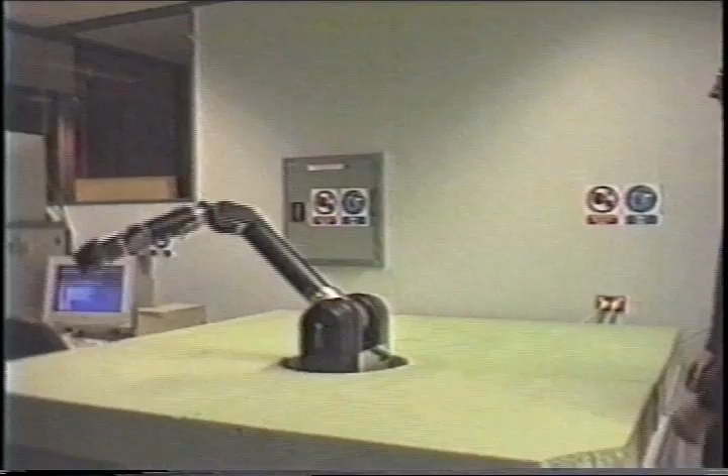Instead of trying to develop a perfectly safe autonomous system, the robot should be viewed as a sophisticated tool. The human operator is responsible for using the system in a safe manner. Therefore, the behavior of the robot must be predictable and intuitively understandable. Autonomous functions are required to make the robot an efficient and convenient tool for the user.

In this approach, the basic robot behavior is to compensate for its own weight in a way that is perceived by the user as predictable and non-threatening. This video shows a person safely interacting with the robot.

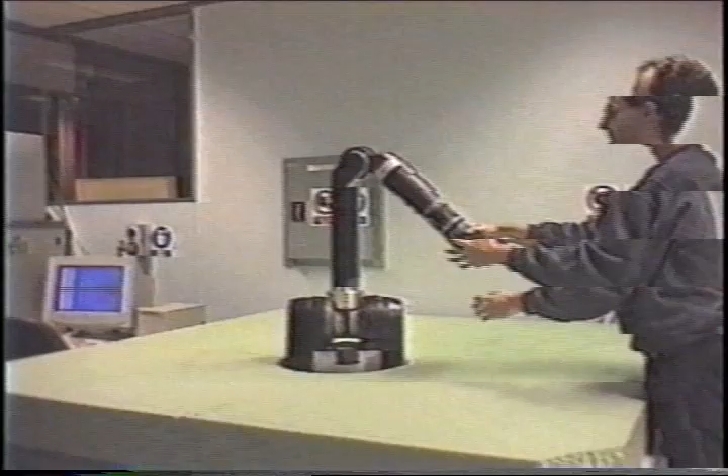The next stage in the robot's development is to allow autonomous motion to desired goal configurations, while preserving the original characteristics of the zero-G floating behavior. The system strictly limits motor torques in a way that ensures safe operation.

Finally, it is planned that the robot will be controlled by a visual interface developed at our laboratory that detects the user's gaze point and facial gestures.

When the arm is not actuated, it drops to the table heavily, and the effects of gravity can be easily observed.

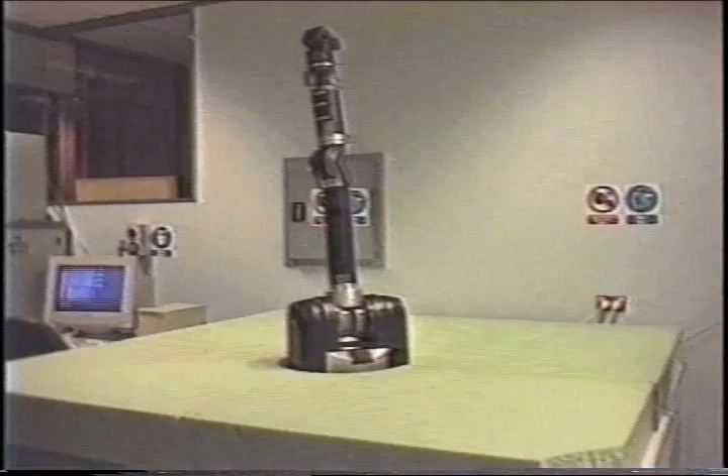In this experiment, the gravity constant is increased by 60%. The overcompensation of the gravitational forces makes the robot try to reach a vertical configuration as if it was hanging from the ceiling. The small friction with the cable drives makes the robot swing for a while before the friction consumes the kinetic energy and the robot points upwards.

Human-Robot Coordination: Real-Time Stereo Face Tracking System, Australia.

This video demonstrates our real-time face tracking and gaze detection system using a stereo NTSC camera pair and a Fujitsu vision processor. The facial model is automatically acquired by first finding skin-coloured regions in the image, then using intensity information to extract templates of the eyes and mouth. Using these facial features, a 3D model is built by stereo matching.

This sequence shows real-time 3D face tracking. The two images correspond to the views of the left and right cameras. The facial features being tracked are marked with squares. The system fits the previously acquired 3D facial model to the live video inputs, and is robust to rotation and translation motions, as well as deformation and partial occlusion of the features.

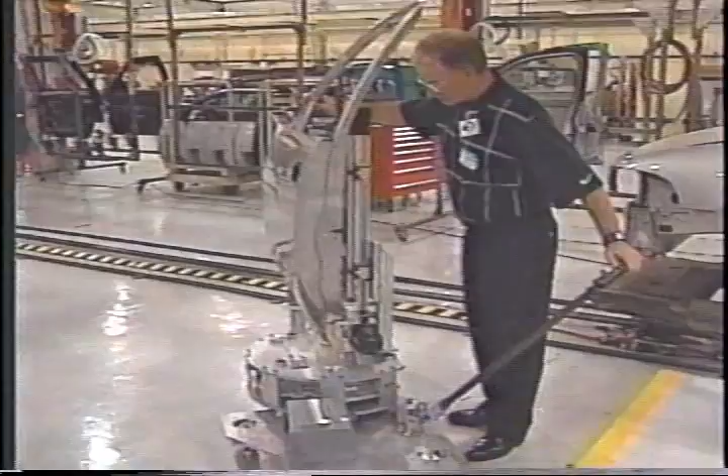The cobot technology from Northwestern University combines intelligent robotic assistance with human force and perceptory senses. This is Scooter, a prototype cobot developed by Northwestern University graduate student and General Motors intern Witaya Wannasuphoprasit.

The worker provides the force to move the cobot and its load, essentially coupled to the passive device through his efforts to move the load. The cobot offers assistance in moving the load, but more importantly, through a software-driven process, it helps the worker guide the load to its final resting spot.

Invisible or virtual walls are programmed in. The cobot allows movement only within and along those walls. The wheels simply pivot and redirect worker energy along the invisible virtual walls. There are no brakes on this unit.

The programming still allows for the worker to see or feel adjustments needed and provide the force necessary to modify the path of the load.

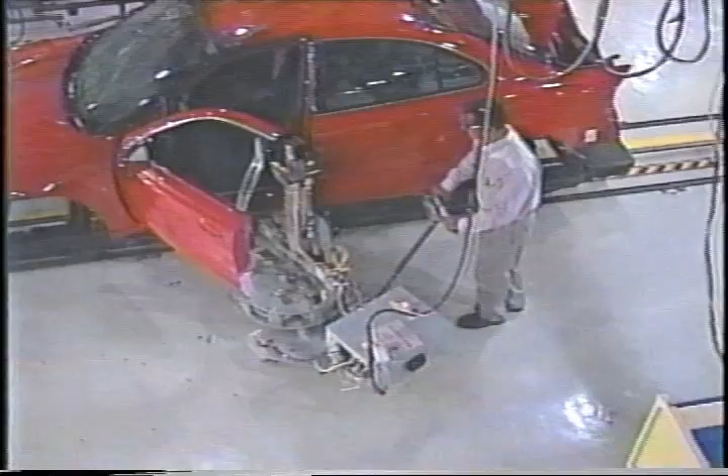Building on the promise of Scooter, the GM Northwestern team designed and built the world's first industrial cobot, a full-scale prototype cobot-based door unloader for the Pontiac Grand Am. The doors-off process, the first task in the GA Bill of Process, requires removal of the painted door from the painted body shell in order to simplify the remaining GA assembly tasks. The doors-off tool has two primary components: a scooter-like computer-assisted cobotic base and a non-traditional door removal tool.

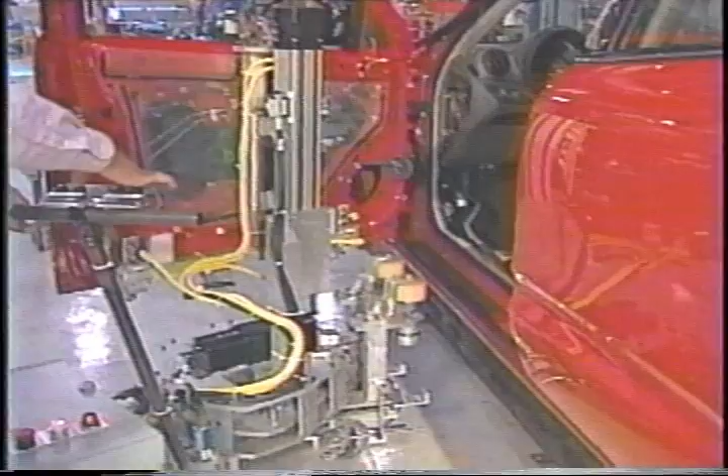The cobot unloader, like Scooter, demonstrates all the basic cobotic control modes. For example, the door unloader can enforce a circular trajectory on the operator. Once the doors off the vehicle, the cobot executes an escape trajectory that, for quality purposes, clears the door and the unloader from the vicinity of any Class A surfaces on the vehicle. The operator then drives the unit toward the drop-off station, where the door is carried away to the door trim area for installation of equipment like the glass and window regulator.

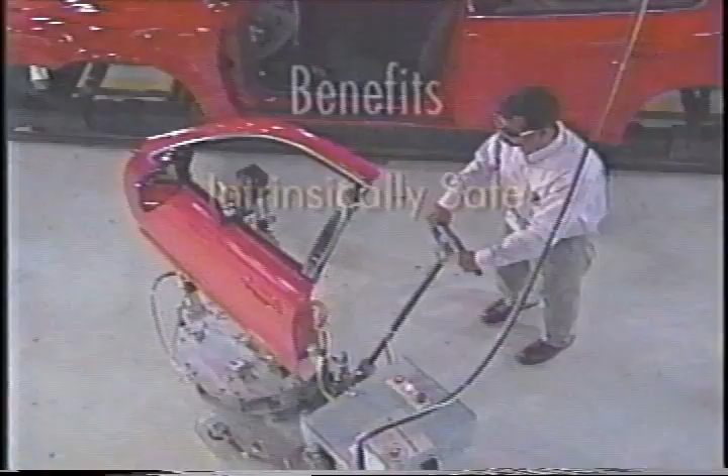The door unloader and its predecessors highlight the original goals of the project: to provide the assembly line worker with state-of-the-art assist tools, the ability to mitigate ergonomic problems by providing large, easy-to-hit gross targets, and the potential to impact productivity. These cobotic devices are intrinsically safe. There are no unsafe, powerful motors. Without these motors, the cobots themselves appear less bulky and unwieldy to the operator. Finally, as the system is software-driven, it is flexible and adaptive.

Human-robot coordination: a new telecommunication system using C-term. Japan.

We'd like to present a new telecommunication system designed to realize a new type of communication, where a skilled operator at an operations center teaches an unskilled worker at a remote site how to use a machine by telephone.

Now I'll teach you how to use the device. First, push button alpha on unit A. I got it, yeah, I pushed it. Next, push button beta on unit B. Well, let me say... oh God, look, I pushed the wrong button, I think.

With this approach, the skilled operator's instructions must be detailed and concrete, and voice-only communication is often insufficient. We'd like to propose a new telecommunication system to realize a new type of communication. This is the C-term, the core of our new telecommunication system. The C-term is set up at a remote site to assist communication between a skilled operator and an unskilled worker, and it's composed of a rotatable CCD camera and a laser pointer.

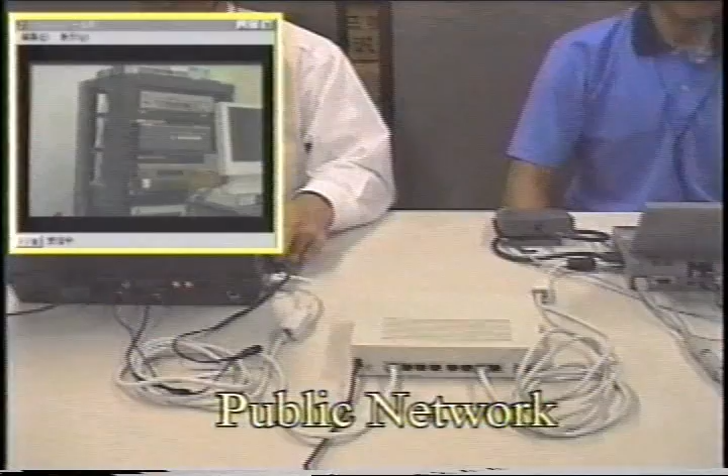The telecommunications system at the operations center consists of a headphone with a microphone, a joystick, and a client computer for controlling the C-term at the remote site. As TCP/IP protocol is used for transmitting voices and images, the two locations can be connected through any public network, such as analog telephone networks, ISDN networks, and the Internet.

The system at the remote site consists of a headphone with a microphone, a C-term, and a host computer with which to control it.

Now I'll teach you how to use the device. First, push this. Okay, I've pushed it. Now push this. Okay, that's done.

All right, good work. Communication is smooth and easy without misunderstandings when the C-term is used. This telecommunication system using the C-term provides easy communication and high cost performance.

Human-robot coordination: development of a 3,500-ton field robot. Australia.

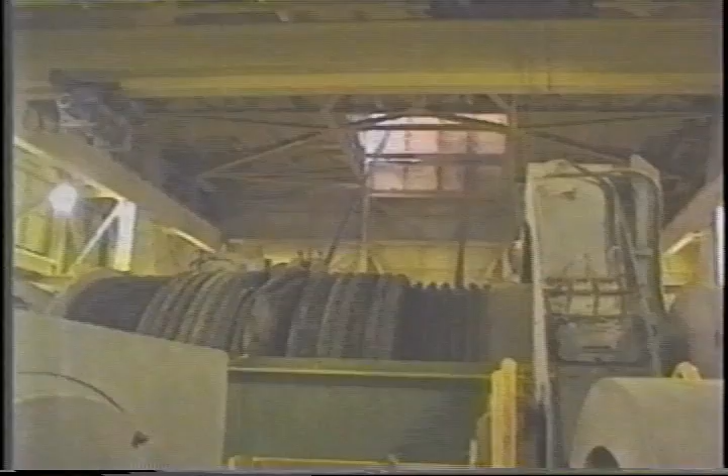Draglines are large machines used in open-cut coal mines to remove the dirt covering the coal seam. Draglines typically weigh between 3,000 and 5,000 tonnes and can cost up to $100 million. They are electrically powered through an umbilical cable from a portable substation. Each axis of the dragline is driven by one or more 500 horsepower DC motors. The operator controls the dragline with two joysticks and a set of foot pedals.

The aim of our project was to reduce total cycle time by automating the dig-to-dump-to-dig motion, which comprises about 80% of a typical cycle. Even a small reduction in time will lead to significant productivity improvements and hence cost reductions.

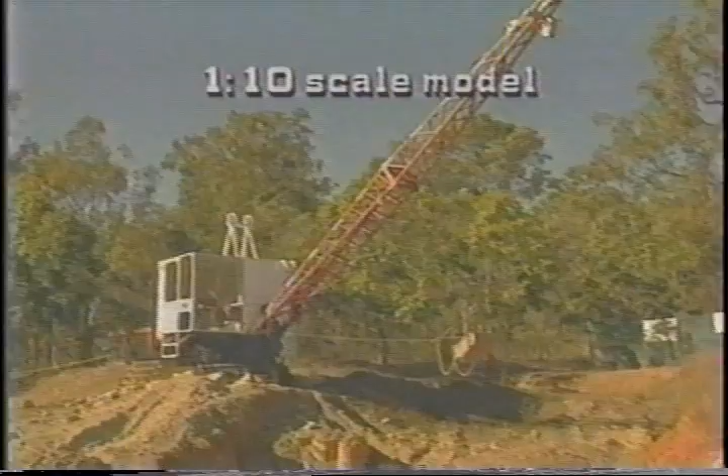Control of the bucket's pendulum swing was the major technical challenge, and visual servoing was identified as the means of controlling the bucket's position. Experiments performed in 1994 by CSIRO proved the concept of controlling a pendulum using visual servoing. In 1995, a basic swing control system was developed for a 1/10 scale model dragline. These early successes led directly to the present full-scale implementation project.

Our automation system comprises three main components. The automation system computer is installed in an electrical control room. The swing angle of the bucket is determined by a laser scanning system located near the boom tip, and the operator's controls are physically moved by servo motors under computer control.

Before use, the automation system must be trained. The operator performs a cycle marking the dig and dump points using a button located on one of the joysticks. Intermediate points along the bucket's trajectory may also be marked.

When training has been completed, the bucket is filled by the operator and a second button is pressed, starting the automation system. The bucket is moved from the dig point to the dump point and back again following an optimal trajectory and passing through intermediate points marked during training.

The automation system relinquishes control to the operator at the end of the cycle, or when a joystick is physically overridden. The operator fills another bucket and the cycle is repeated.

The state of the automation system may be monitored by the research team from either the operator's cabin, the electrical control room, or a remote caravan which communicates with the dragline via a radio Ethernet.

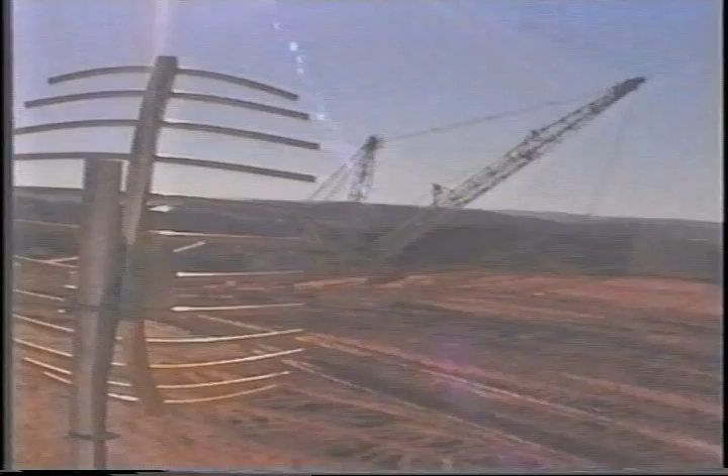A major advantage of the automation system is consistent operation, which minimises wear and tear on the machine and provides accurate placement of dirt.

Human-robot coordination. Human-robot interactions. USA.

Human-robot interactions. In this demonstration of robot-human cooperation, a wooden board was transported and hung on a fixed frame.

The robot replied to the taps with the answer: zero skillful trajectory stored in its computer memory. The human uses both hands to lead the robot to the frame, as they are needed to twist the board.

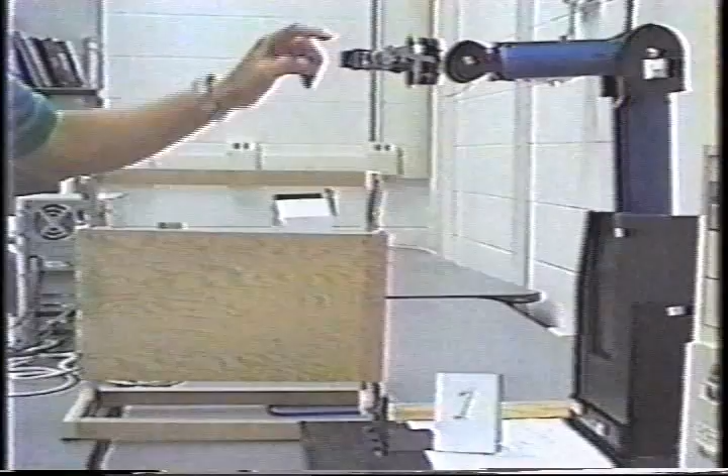After task completion, the robot reports a new skillful trajectory, indicating that the traveled path does not match those, if any, in the computer storage. The robot responds to the taps with the answer: one skillful trajectory, indicating that the computer had one skillful trajectory stored.

The robot reported six skillful trajectories in memory. As the human starts to lead the robot, he uses both hands at first. He gradually releases one hand after deciding that the robot is traveling with the board along an acceptable path. The other hand still supports the board to balance the twist caused by gravity.

The insert at the lower corner of the screen shows the previous task whose path was stored and now retrieved to serve as a matched trajectory. After the task was completed, the robot reported six skillful trajectories, indicating no new skillful ones were added to the memory.

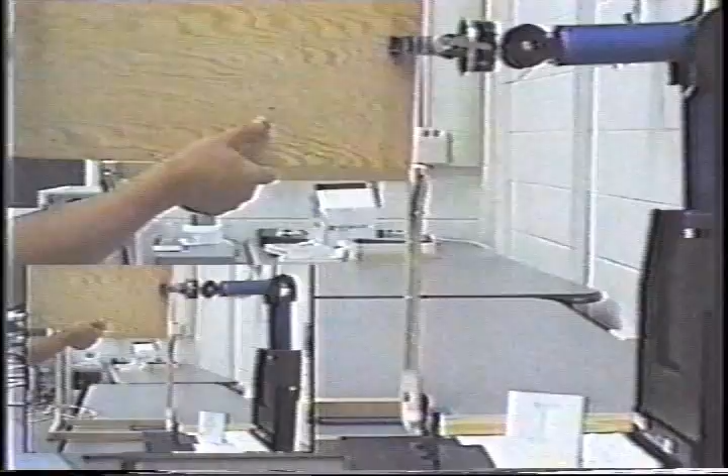The robot found and retrieved a matched path along which it travels. The human interrupts the robot by an impulsive force to indicate that the trajectory is not acceptable. Next, the human signals the robot to continue and leads it to the frame. The robot reports a new skillful trajectory, since the portion after interruption is new.

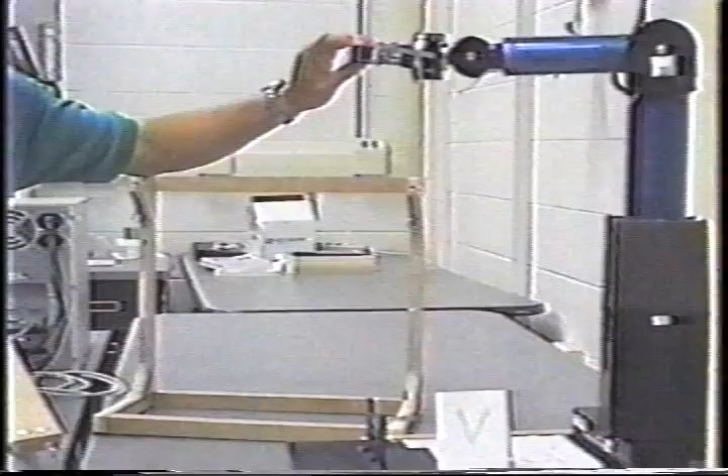In this demonstration, the frame was moved to a new location through a translation and rotation. The robot requests a set start position, since it does not know the new location of the frame. In response, the human adjusts the gripper's coordinate frame to approximately compensate for changes in the frame's location.

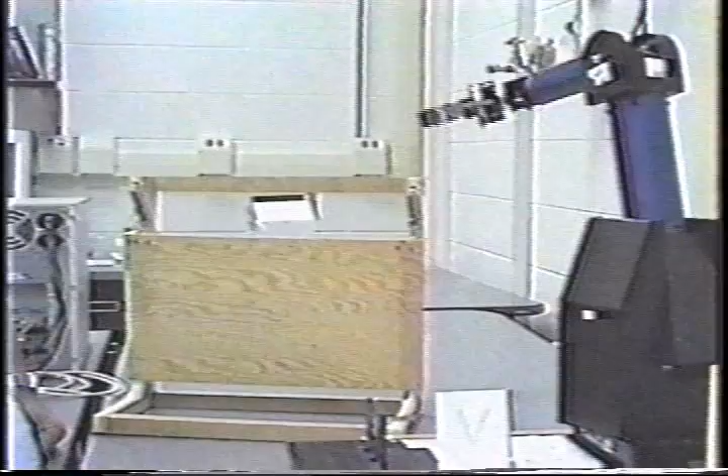Human-robot coordination. Dancing with Juliet. USA.

In this video, we show human-robot interaction based on task and posture coordination and control behaviors. The Stanford robotic platforms each have a total of 9 degrees of freedom with a holonomic base and a Puma manipulator.

Here, the end effector is held in a fixed configuration while the robot posture is changed. Using the sonar, the robot is avoiding collision by moving in a dynamically consistent fashion to prevent any coupling accelerations at the end effector.

Combining posture behavior with object-level compliant motion behavior, we can create a robotic assistant. Our assistant is seen here carrying a load while complying to the gentle guidance of a human.

The idea of a robot assistant can be extended to multiple platforms. We are using the wrist force sensors here to fully utilize the higher bandwidth of the manipulators while still benefiting from the increased workspace provided by the bases.

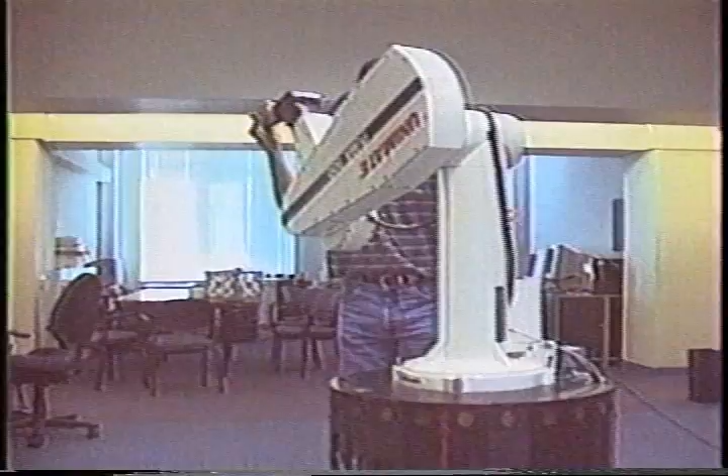Novel robotic systems. Micro-inspection robot for 1-inch pipes. Japan.

A micro-robot for small pipe inspection has been developed. It is 23 millimeters in diameter and 110 millimeters in length. It can be used to inspect pipes 1 inch in diameter. It consists of various micro devices, all of which have been newly developed at Toshiba R&D Center.

This is a brushless micro-electrical motor which propels the robot. The torque of the motor is amplified by this planetary gear and worm gear. The robot is propelled by a planetary wheel mechanism.

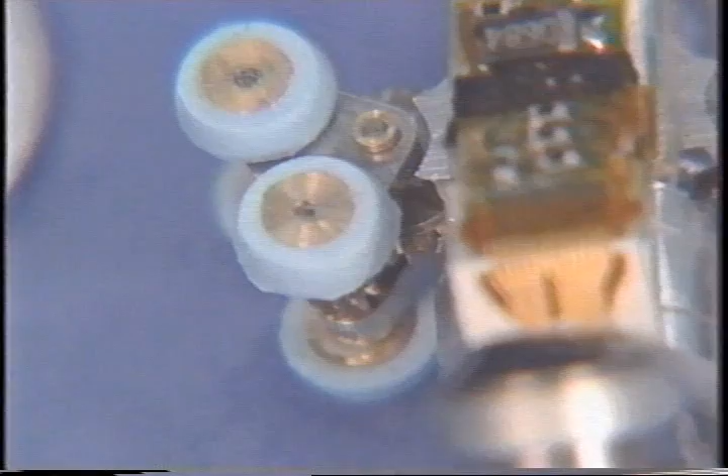This is a micro-pneumatic stepping motor with high torque. It rotates the camera and the hands. This shows its driving principle, which is based on a wobble motor.

This shows a cross-section of the hand. It is made of rubber and is driven pneumatically. This is a micro CCD camera, specially fabricated for this robot.

The planetary wheel mechanism can adapt to changes in pipe diameter and also automatically regulates the force of the wheel on the walls of the pipe.

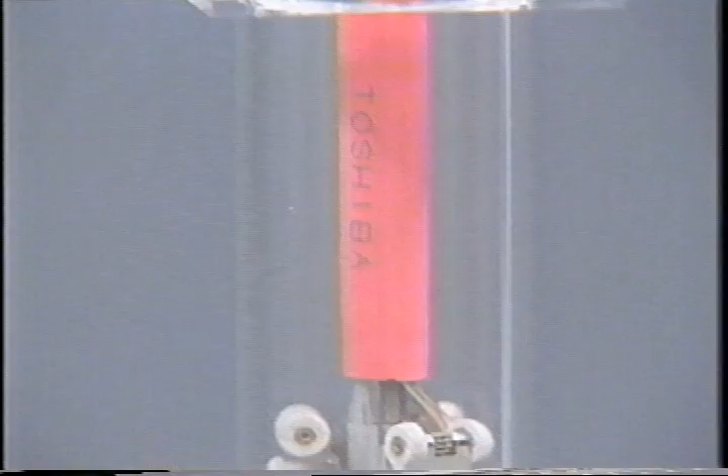The flexible rubber link allows the micro-robot to negotiate bends in the pipe.

The camera is a high-resolution device with 410 kilopixels, making it easy to detect even small cracks in the pipe.

The camera and the hands are rotated by a micro-pneumatic stepping motor, which achieves a torque about 10 times greater than a conventional motor of the same size.

The hands bend in any direction by controlling pressure in the internal chambers. The hands are used for recovering small lost objects in pipes.

Novel robotic systems: a 1 millisecond grasping system using visual and force feedback. Japan.

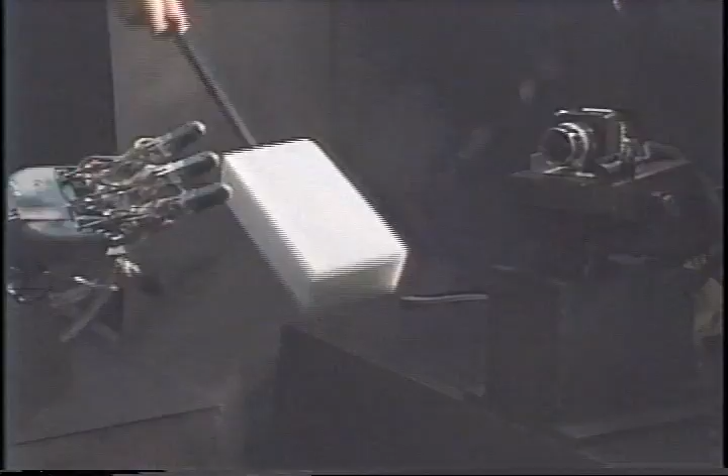This video shows a grasping system using high-speed visual and force feedback. Here, a hand grasps an object observed by high-speed visual feedback. After grasping, compliance control is executed using force feedback.

This grasping motion is realized by integrating subtasks such as tracking, reaching, and grasping. Because each subtask is realized by high-speed sensory feedback, the grasping motion has high responsiveness to dynamic changes in the environment.

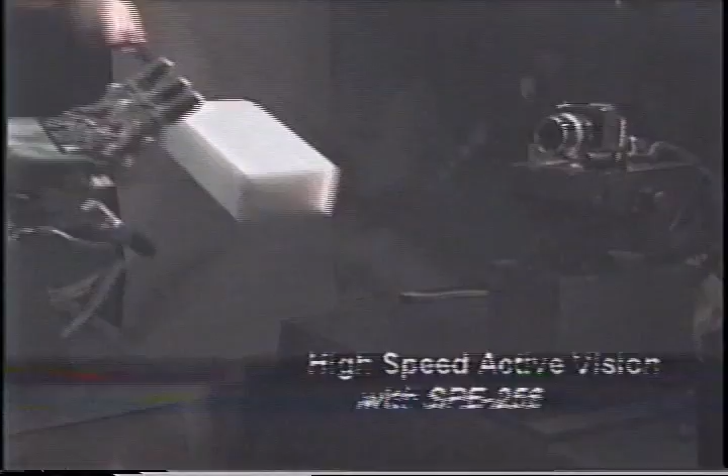The system consists of an active vision module, a hand arm, and a digital signal processor (DSP) system. The vision module is based on SPE256, a 16 by 16 SIMD processing array with photodetectors. Because each processing element is directly connected to a photodetector, visual processing is executed in parallel.

The hand arm is a human-like manipulator consisting of a 7-axis manipulator and a 4-fingered, 14-jointed dexterous hand. Force sensors are installed at each finger joint and at the wrist for force feedback control.

These are controlled by the DSP system, which has a hierarchical parallel architecture consisting of 7 interconnected DSPs. As a result, all sensory feedback can be realized on the order of 1 millisecond.

By adding other subtasks, the system can perform various different manipulations. As a first example, we show adaptive grasping to an object's changing shape by integrating a pre-shaping motion.

Next, we show avoidance of an obstacle during grasping using visual feedback. Avoidance of the obstacle moving at high speed is realized.

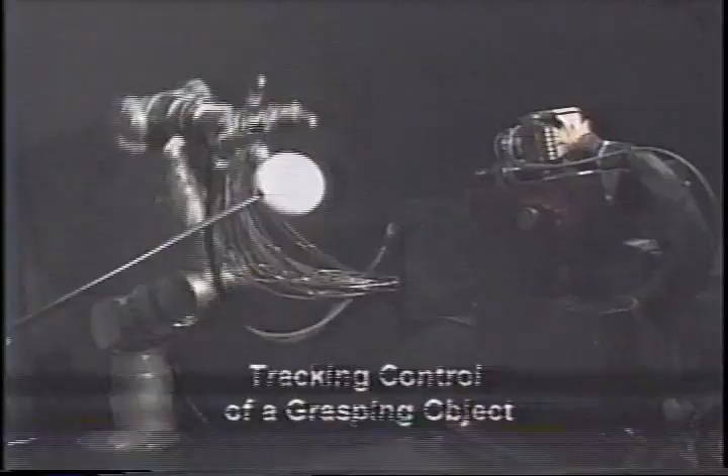Lastly, we show tracking control of a grasping object relative to an obstacle. The distance between the grasping object and the obstacle is kept constant.

In future, due to the increasing applications of robots in the real world, high-speed sensory feedback will play an important role in robotic control.

Novel robotic systems: self-reconfiguration of three-dimensional homogeneous modular structure. Japan.

We have developed a three-dimensional self-reconfigurable structure composed of identical mechanical units. By using many units, a variety of three-dimensional structures can be constructed.

This is a simulation of self-assembly of a 56-unit structure. Starting from a box shape, the target structure is formed in a distributed manner. The green-colored units have already reached a position in the target shape.

Possible applications include machines used in environments inaccessible to humans, for instance planetary exploring vehicles or satellite antennae. Transported in a compact folded form, they can expand to their original structure when working, and repair themselves if some part becomes damaged.

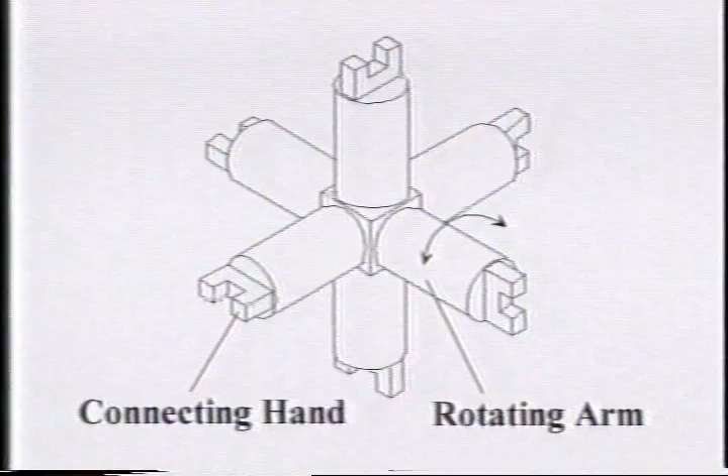In prototype units, rotations and connections are driven by a single motor through electromagnetic clutches. With a span of 26.5 centimeters, the unit weighs approximately 7 kilograms.

Each connecting hand has 2 fingers to grasp each other. Rigid connection is realized by sliding cuffs so that one unit can lift another against gravity. Here the video is fast-forwarded to save time.

Rotation of an arm realizes the pairwise step motion. The moving unit releases the connection with lower units and is then carried to a different position where it is reconnected.

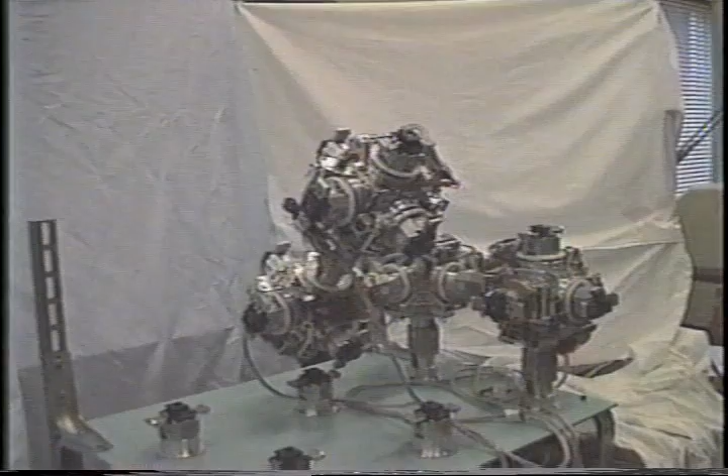Vertical displacement is also possible, sufficient torque being delivered by worm gears.

Mobile robots: Space Cat, a micro rover based on an innovative locomotion concept. Switzerland.

SpaceCat is the name of the second rover breadboarded product within the micro rover study. It was designed and built by EPFL and the company Mecanex. The robot is constructed of 3 different parts. The first one is the articulated arm supporting the payload, which can be rotated 360 degrees around its central axis.

The arm can incline forward to allow the instruments to reach the soil. The whole module can also be bent backwards. This movement allows the robot to modify the position of its gravity center at any time. The arm can fold to its initial position, where the gravity center is at its lowest position, assuring maximum stability.

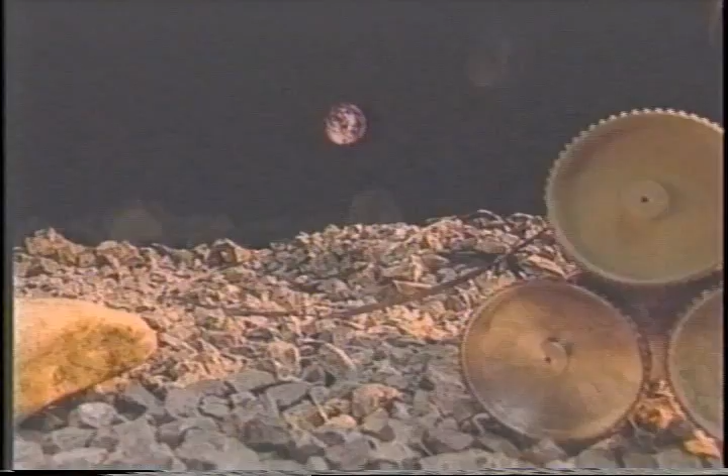In this sequence, the rover climbs up a more difficult slope. You will notice that the arm is unfolded so that the gravity center is set forward, helping the robot to climb. When the rover is in difficulty, it simply rotates its wheel modules to advance and steps over the stones. If the rover falls over, it can use the articulated arm to stabilize its position.

Once the rover reaches the top of the slope, the arm can be folded so that the payload reaches its lowest level.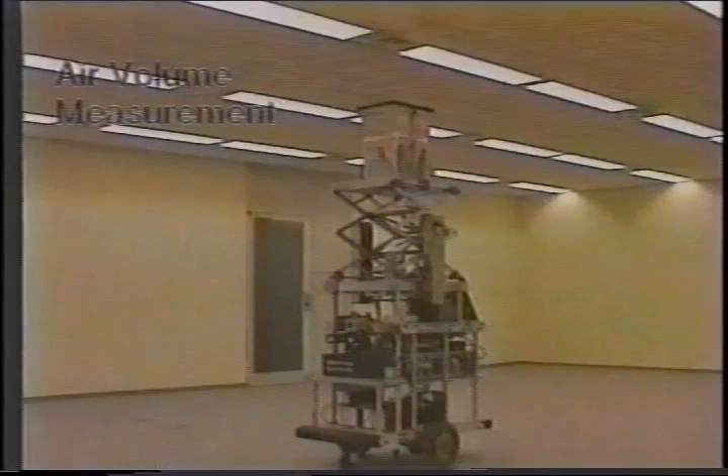However, the self-position of the robot cannot be calculated when the robot fails in recognizing the landmark, and then the robot stops working. Therefore, we have proposed behaviors of error recovery and a hierarchical adaptive and learning architecture system, HALOS, that makes the robot adapt to the environment by learning so that it can continue to work.

The structure of HALOS is like this. In HALOS, there are 4 states of the robot. The upper state has more behaviors of error recovery than the lower state, so the robot changes to the upper state when an error occurs, and the time when the robot changes to the lower state is decided by a value function.

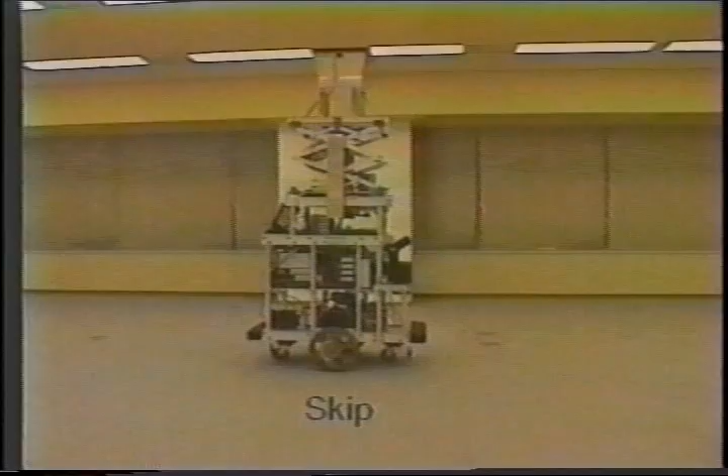However, errors can occur that cannot be recovered by the behaviors of error recovery. In such a case, the state of the robot changes to the reconstruction state. In this state, the robot must relocate its self-position to the starting point by the global matching action.

Mobile robots. Gait generation for multi-segment inchworm-like robot locomotion. Singapore.

This video demonstrates the gait generation of an inchworm robot. The robot consists of a series of extensors and grippers. It moves by alternating the extensor and gripper motions. Solenoid actuators are used in the grippers and extensors. The solenoid has on and off states.

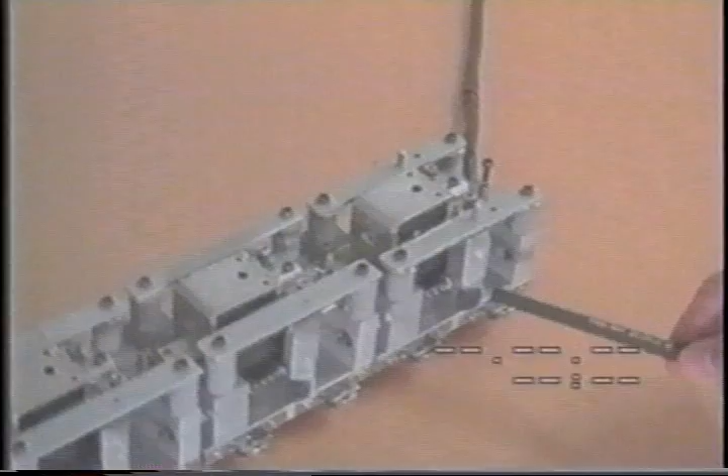We use a finite automaton to model the robot motion. State transitions are defined based on the kinematic constraints. The yellow imaginary auxiliary modules are added to the robot for gait generation.

To move forward, the head auxiliary extensor is set to the on position, and the back auxiliary extensor is set to the off position. The auxiliary grippers remain stationary within the gait cycle. In single stride motion, 2 extensors move at the same time. The gripper in the middle will be released and move forward. This action is repeated until all grippers return to the initial state.

The same algorithm can be applied to the backward motion. The back auxiliary extensor is set to the on position, and the head auxiliary extensor is set to the off position.

The single stride gait is also fault tolerant. The gait generation algorithm can bypass the state of the faulty extensor automatically. The active actuators will drag the faulty extensor, assuming that all the grippers still function well. These gaits take fewer steps than the normal one-stride gaits.

Online gait change can be achieved by resetting the auxiliary extensors to the initial states in the direction of travel. Different gaits can be used in various environments.

A double stride gait will make the robot move 2 stride lengths in one gait cycle. 4 extensors move simultaneously in this gait.

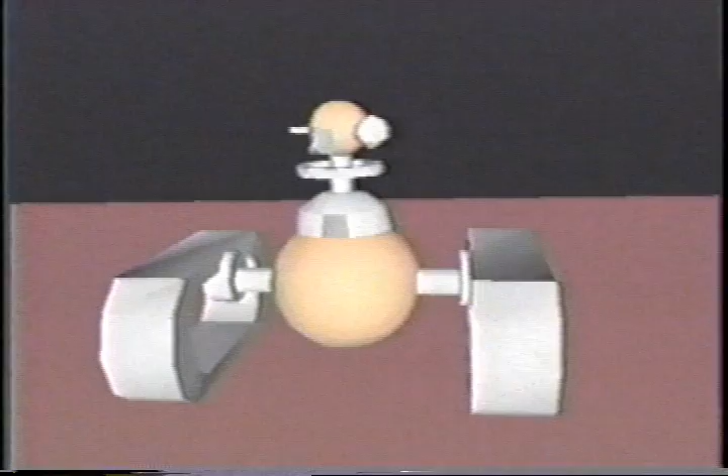The sensor-networked robotics project focuses on a symbiosis between blind but mobile robots and a stationary environment-based sensor network.

We have pioneered several innovations, starting with methods to calibrate a camera network spanning multiple rooms and corridors. A real-time occupancy map is then generated using the sensor network. Since no tracking is involved, the system's reliability and throughput are not affected by the number of dynamic objects. The system is sensitive enough to detect objects as small as human feet.

Each blind robot tunes into the occupancy map, being broadcast throughout the environment, which allows them to navigate real-time dynamic situations.

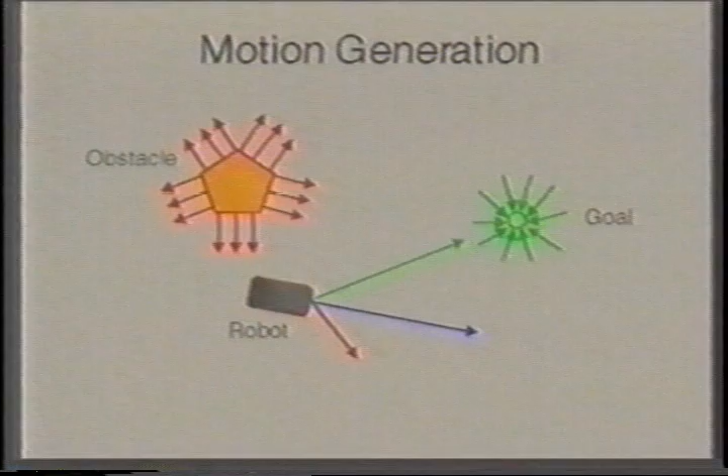The motion generator relies on a potential field technique. The goal defines an attractive force field, and the obstacles define repulsive force fields. The combination of these forces define a resulting force on the robot that guides it towards the goal while avoiding the obstacles. We have introduced several improvements to the force definitions in order to produce smooth motions. For instance, as can be seen here, the robot is not influenced by an obstacle segment when it is parallel to it.

Finally, the goal tracker keeps track on a target using pixel correlation between successive image frames. Special care has been taken on the correlation score determination to ensure that no drift occurs. The motion generator runs at 40 Hz and asynchronously receives the obstacle maps and the updated goal positions. No global map is memorized.

The whole system has been implemented on board of the robot Lama, a 6-wheels Marsokhod chassis equipped with a pair of stereo cameras, a compass, and a 2-axis inclinometer.

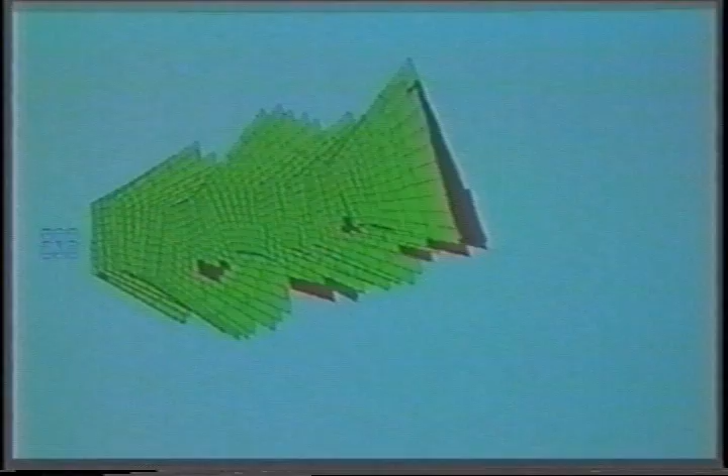The various algorithms are run on 3 CPUs and are encapsulated into 4 independent modules. Modules are controlled by a supervisor implemented in C-PRS, a procedural reasoning system. With this approach, several tens of runs of 20 to 40 meters have been successfully achieved by Lama. This motion mode can be selected by a high-level navigation planner that would autonomously select the goals to be reached.

Medical robots. Laparoscopic telesurgical workstation. USA.

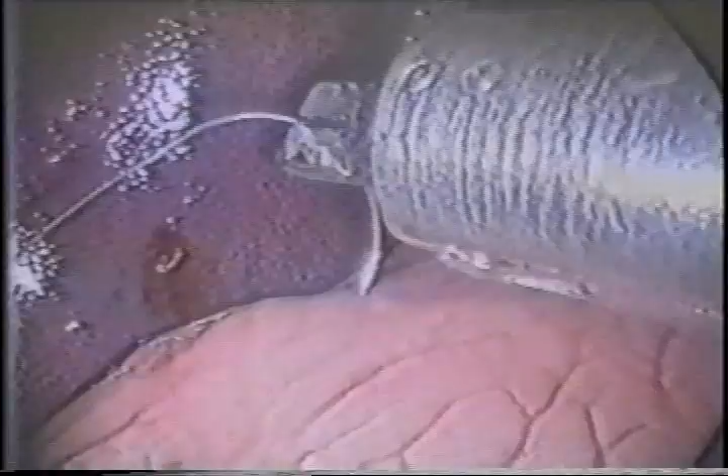We particularly chose this procedure to show that we could exert enough force to allow the needle to enter the rather muscular stomach wall, which is what you're seeing in this part of the videotape. There's more than enough force to drive the needle through the stomach wall and for it to emerge on the other side.

There was certainly enough dexterity to be able to grasp and re-grasp the needle, as shown in this particular segment.

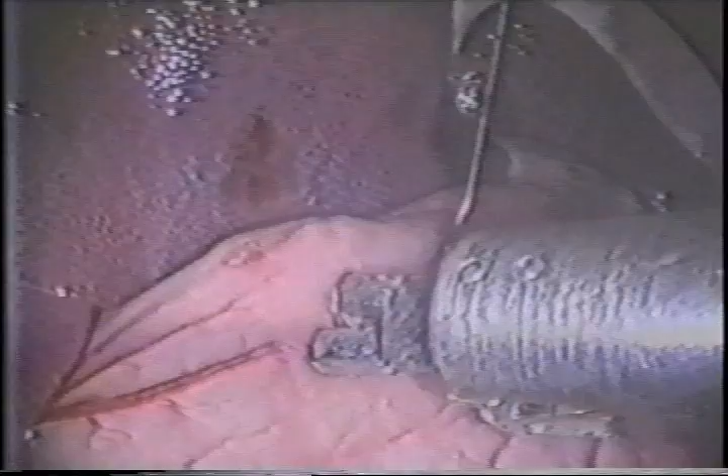The next segment of the videotape will show the act of throwing a suture in the stomach wall. Suturing involves using the master manipulator to thread the needle through the stomach and retract it onto the other side.

The procedure performed at UCSF involved the full-scale Nissen fundoplication, and what you see here is just one or two sutures. This is the first suture, and in the next segment of videotape you will see a couple of knots being thrown.

In order to perform the knotting, we had to use a manual instrument, operated by the second intern. That's the instrument you see on the left.

In this procedure you'll see the first knot being thrown. Note that this version of the prototype instrument was unimanual. The second version of the instrument will have both the left and right hand instruments operated by robot, unlike this one where the instrument on the left was manually operated. Also, the robotic instrument will be more tapered, like the manual instrument you see on the left.

The first knot has now been thrown, and this last piece shows how it is possible to easily throw a second knot as well.

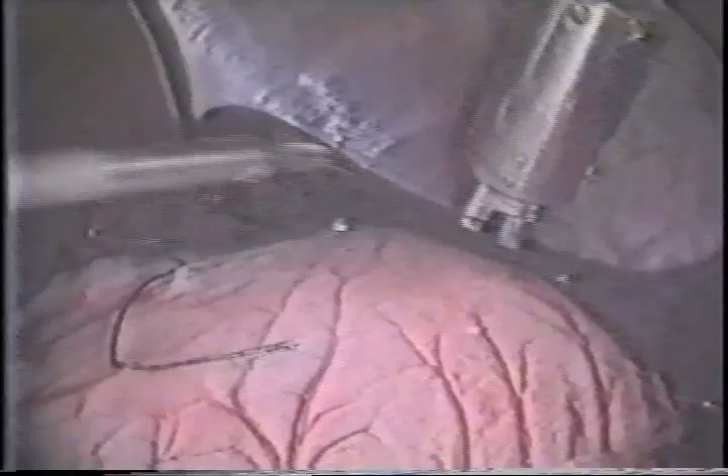This version of the experiment was performed a couple of times in the animal laboratories. The results were satisfactory, with some feedback on the psychophysics of using the instruments, now taken into account in the design of the second version of the workstation. We have received preliminary FDA approval to begin trials in human patients as well. The research has progressed, and we expect to have our bimanual version before the end of 1999. The research has been supported by NASA, the National Science Foundation, and the Office of Naval Research.

Virtual environments in robotics. A virtual excavator for operator training and controller evaluation. Canada.

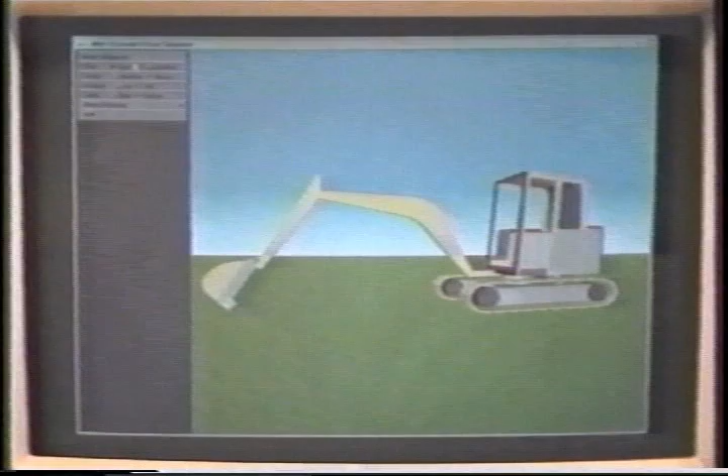Research carried out in the Robotics and Control Laboratory at the University of British Columbia addresses issues of control of excavator-based machines. A simulated virtual excavation environment has been developed as a tool for operator training and the development of human interfaces and teleoperation strategies.

The simulator includes a graphically rendered visual environment, a force feedback joystick that allows the operator to command excavator motion, and a digging model that allows the operator to experience bucket interaction in real time.

Two haptic devices have been employed as an operator interface: the maglev joystick, a 6-degree of freedom rate control device, and the twin pantograph, a 5-degree of freedom large motion interface.

The digging and payload forces reflected to the operator are synthesized using the simplified dynamics of a real Takeuchi mini excavator and a novel dynamic model of bucket-soil interaction. Previous soil interaction models have provided only limited static simulation results.

The digging model assumes a flat cutting surface that moves through the earth as commanded by the human operator. The resultant estimated forces and torques are the combination of viscous and Coulomb friction, as well as soil stiffness, soil shearing, and load accumulation effects.

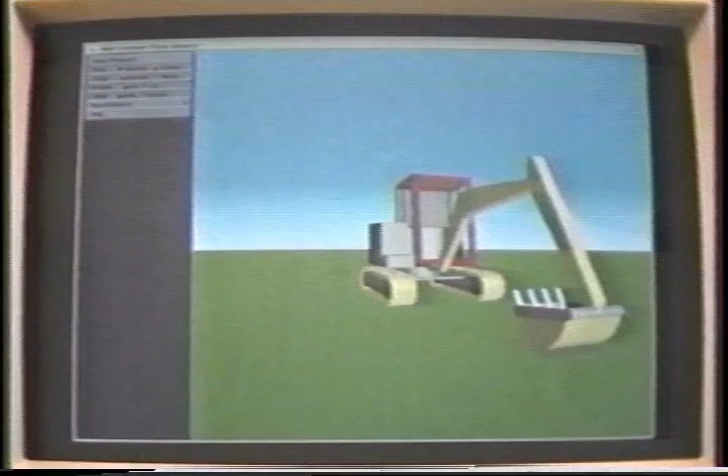The visual environment includes a scale model of the mini excavator and is rendered by a Silicon Graphics workstation. A graphical user interface allows the user to select a variety of viewpoints that aid visualization and control during digging.

Visual environment deformations are also rendered, clearly showing excavated trenches as they form. Perception of the bucket height and its distance from the ground plane is aided through the use of a bucket shadow.

The simulator has provided a realistic enough environment for evaluating a new variable impedance control method, as well as automation strategies for excavator-based machines.

Plans for future work include the modeling of non-homogeneous ground environments that may include submerged objects, such as pipes and rocks, thus making it ideal for operator training.

Virtual environments in robotics. Interaction with simulated environments using a magnetic levitation haptic interface device. USA.

In the Microdynamic Systems Lab at the Robotics Institute of Carnegie Mellon University, we have developed a new haptic interface device based on magnetic levitation.

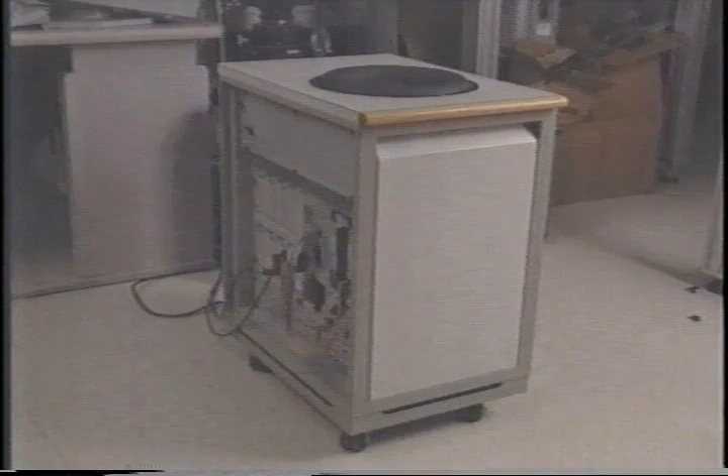The device and all amplifiers, processing, and power supplies are contained in a single desktop height cabinet. The range of motion of the floated handle is 25 millimeters in translation and 15 to 20 degrees in rotation.

Its maximum stiffness is 25 newtons per millimeter at a 1000 Hertz servo control rate. Motion can be allowed or constrained in any direction.

The moving part of the magnetic levitation device is a thin hemispherical shell with 6 embedded actuator coils and a handle. Permanent magnet assemblies are fixed on either side of each coil.

3 position sensor assemblies focus light from LEDs in the floating shell onto position-sensing photodiodes. The magnet and sensor assemblies are mounted in an outer aluminum shell set into the top of the device cabinet.

The magnetic levitation haptic interface device can be used with a workstation as a combined haptic and graphic interface for simulated environments. Simple simulations can execute on the local control processor, using the workstation for display only.

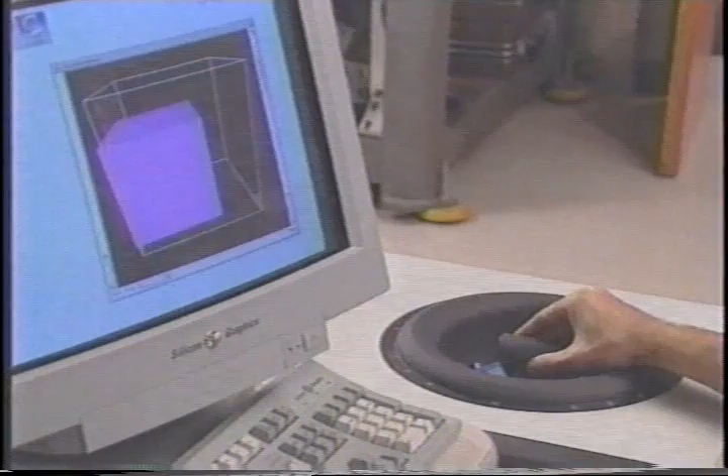In this simulation, the user feels corner, edge, and face contacts between the inner cube and the outer wireframe cube.

The 75 Hz small motion bandwidth and the 5 to 10 micron position resolution of the device are sufficiently high that realistic surface effects can be emulated.

Here, each quadrant of the displayed surface has a different friction and texture. Impact dynamics are also simulated.

More complex dynamic simulations execute independently on a workstation and exchange tool position set points with the local controller through an Ethernet network. The simulated tool and the actual haptic interface device position and orientation are coupled by stiffness and damping gains.

Objects in this simulation are manipulated with a paddle-shaped tool. The user can strike, push, pick up, or throw and catch objects in the simulated environment and feel the computed dynamic response of the tool.

The simulation models physical dynamics, performs collision detection, and evaluates motion constraints on all the objects in the virtual environment in real time at an update rate near the position bandwidth of the haptic interface device.

Virtual environments in robotics. Interactive design of a virtual factory using cellular manufacturing system. USA.

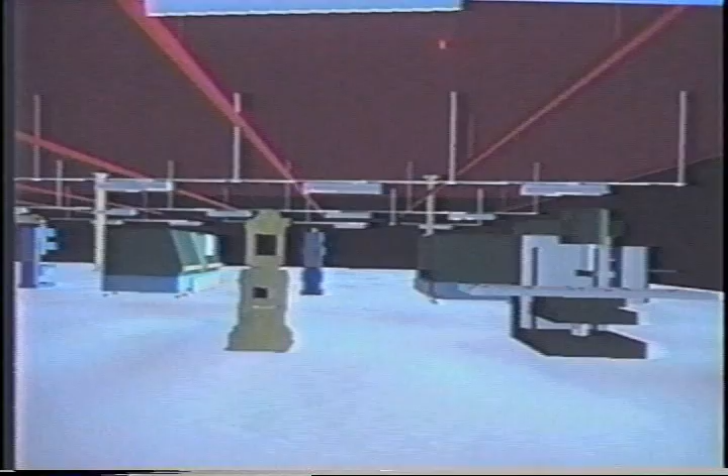We have modeled a virtual factory which presently consists of several machines, robots, and human operators. The goal of the project is to design and test and improve manufacturing facilities before a physical prototype is built.

The input to the virtual factory is presented through a novel 3D virtual matrix interface where the user can input part machine process information interactively.

Next, a cell formation algorithm called the modified Boolean method is applied to form groups. In this case, the algorithm returns 3 different groups.

This matrix can also be rotated in a 3-dimensional view, and we can see that in the Z direction, the machine loading information is provided.

Once this information is read, the user can now change operation from machine to machine and also remove exceptional elements.

Now this information is provided into a top view of a virtual factory where the user can pick a whole group of cells and move it around from room to room and within a factory. In this case, the intersection algorithm has been disabled.

The user can also pick one machine at a time and place it wherever he or she desires. In the immersive front view also, a whole group of machines or an individual machine can be manipulated within this virtual factory.

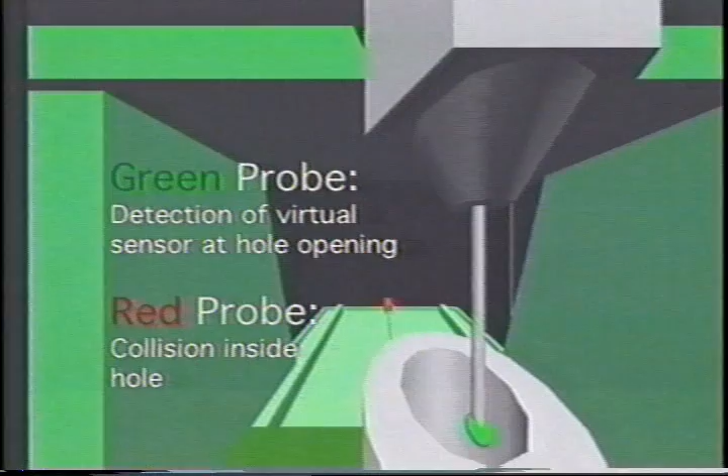We perform triangulation inside a CAD environment, ProEngineer in this case. CAVE and ImmersaDesk virtual reality platforms developed at UIC using Silicon Graphics processors are used for the implementation.

Industrial automation: design and performance testing of sensors with soft contact surfaces having 8 sensing cells. Yugoslavia.

New sensors with 8 sensing cells mounted on the fingers of a parallel gripper, enabling measurement of all relevant components of external load in various task realizations, have been presented.

Reflexive optocouplers are mounted on a separate plate enabling easy disassembly. 4 optocouplers for measurement of normal force are mounted in corners, and the other 4 for tangential forces between them.

External load deforms the sensor's elastic body. This deformation is detected by optocouplers measuring the distance between the optocoupler and the corresponding reflexive surface in each direction.

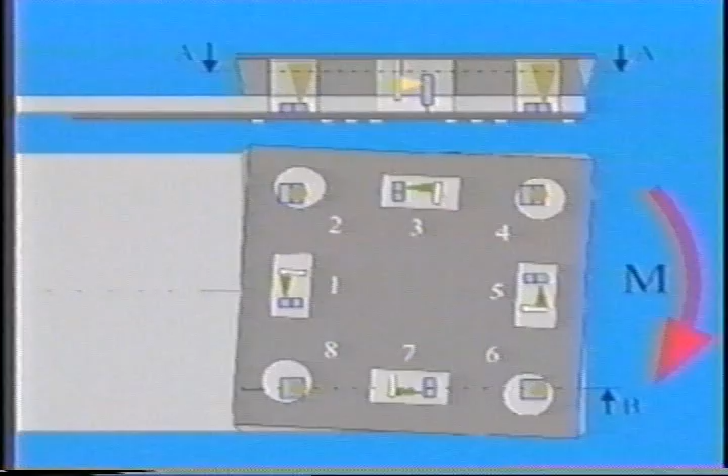This animation schematically shows sensor behavior when normal force, tangential force in 2 mutually orthogonal directions, torque, and composite load are applied. The sensors are very sensitive and are able to detect force of small intensity produced by human breath, as well as the position of the force acting point.

In this experiment, the contour of an elastic band is followed by a plastic straw, preserving very low contact force. Trajectory is controlled by minimizing tangential force while preserving normal force within a predefined range.

This algorithm ensures that the sensor's grasping surface is permanently tangent on the local contour shape while advancing along the contour. The contour is successfully followed even if the profile is not smooth.

In case of singularity, here in the corner between the 2 fingers, an additional tangential force occurs and the robot stops advancing. The gripper rotates till the contact force becomes orthogonal to the grasping surface again, and then advancing along the contour continues.

In this experiment, on the basis of sensor information, the probe follows a planar slot of rough surface quality. The slot is of unknown and very irregular shape with a variable inclination.

Industrial automation: distributed control of flexible transfer system using learning automata. Japan.

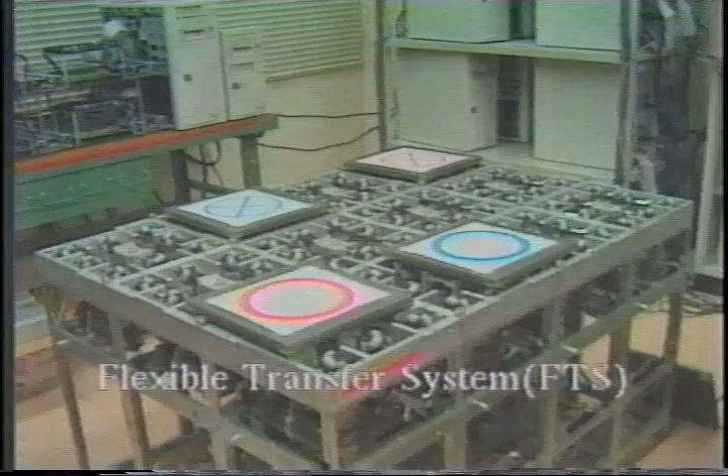We propose a flexible transfer system called FTS as one of a distributed autonomous robotics system. FTS is an advanced type of transport system in flexibility and robustness. In this video, we will show the experimental system of 3x4 modules and show that adaptive transfer paths can be formed from a random state in a fully distributed way.

FTS is composed of many autonomous transfer modules. Any of the 4 sides of the module can be connected to modules which communicate through Ethernet. The direction of a pallet transfer is restricted to modules in the XY direction.

Each module has 8 omniwheels and it transfers a pallet to the neighboring module. Each module has 2 proximity switches. When the module recognizes a pallet with the proximity switches, it will complete the pallet transfer by stopping the omniwheels.

Next, by computer simulation, we show the motion of a pallet transported by modules and a strategic vector on each module. FTS has multi-layered strategic vector fields for the transportation of a pallet by each task.

Each module has action strategies, which are defined as vector values. Local interactions among the modules develop the global strategic vector field, and it corresponds to a particular task.

These vector fields are updated using learning automata, and optimal paths are generated. At the initial state, 4 vector values on each module are almost equal, and pallets are moving around randomly.

After passing enough time, some vectors have a particular direction, and an optimal path is generated. Pallets are moving smoothly, following the yellow arrow that shows the transportation path.

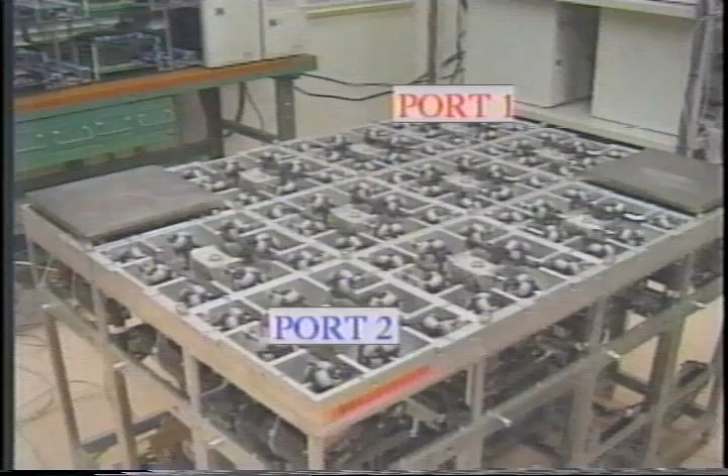Next, we set up port 1 and port 2 on an experimental machine of FTS, and its task is to transfer the pallet between these ports.

At initial state, pallets are moving randomly. Because modules don't recognize their correct position, they cannot explicitly know what is the correct behavior. They are learning the correct direction for transportation as a strategy vector by learning automata.

After 16 minutes, pallets are moving to each destination in no crossing path. A red arrow shows the path to port 1, and a blue arrow shows the path to port 2. Pallets are moving in optimal paths, avoiding collision with other pallets.

In this way, the strategic vector field for an optimal transfer path is generated by learning automata, and a flexible transfer system has been self-organized.

Industrial automation. Impedance-based assembly. USA.

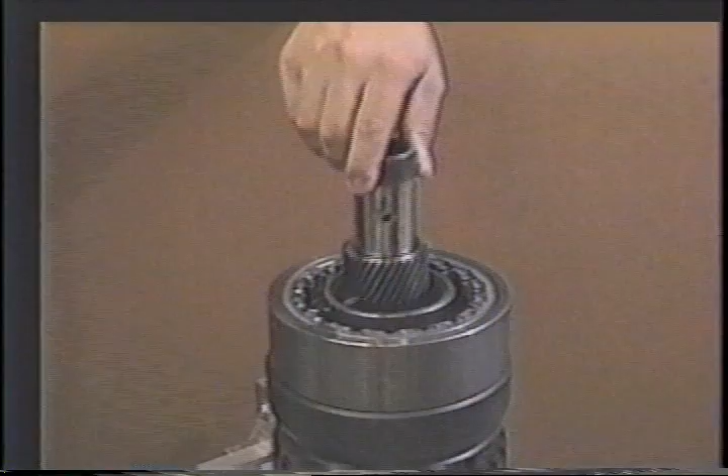Vehicular transmission components, such as this forward clutch and planetary gear reducer, are representative of a large class of assemblies that are still performed manually because conventional automation is unsuccessful. Under position control, automation will fail if the position uncertainty exceeds the tolerance for successful assembly.

To emulate the success of manual assembly, robots must behave compliantly. The experiments shown here were conducted on an Adept 1 robot retrofit with an open architecture controller. Our control implementation is a flavor of impedance control that we call natural admittance control.

In this technique, a model of a robot, incorporating estimates of actual inertias, is simulated in real time to respond to sensed end effector forces plus virtual forces defined with respect to a computed attractor. The physical robot is servoed to track the idealized simulation.

For the forward clutch example, there are 5 toothed rings with a possible radial misalignment 7 times larger than the assembly tolerance. We performed this assembly task successfully using a blind search in the XY plane and in Z rotation while exerting a steady, gentle downward Z force. The uncertainty is thus accommodated with the robot's programmed compliance.

One simple and often successful technique for invoking compliance is the use of a passive remote center of compliance wrist. However, we found passive compliance to be inadequate for assembling the planetary gear set, even when used in combination with implicit force control, as shown in these trials. Assembly attempts were unsuccessful in 50% of the trials due to jamming.

Using natural admittance control, reliable assembly was achieved with a mean time of 11 seconds. Due to force responsiveness, natural admittance control reduced the frequency of jams and was able to recover when jams did occur. Our defined virtual attractor interfaces well with the lower-level natural admittance controller to command search patterns.

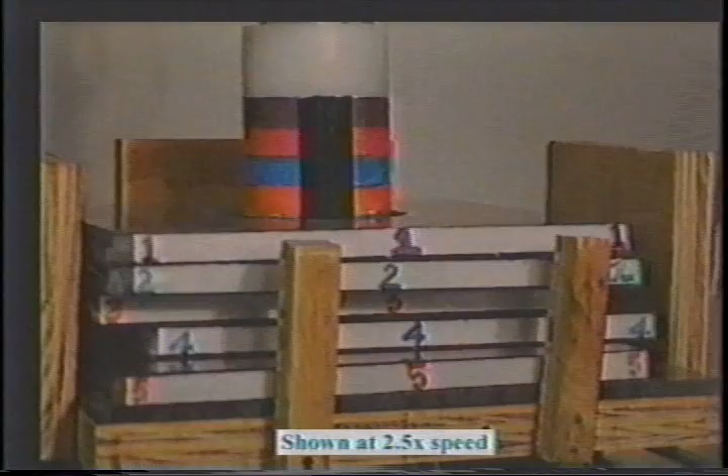In addition, the attractor can provide a bridge to higher-level planning. The task shown here is an abstraction of a more complex assembly in which planning is required. The goal is to guide a key-like peg through a stack of layers, each with a characteristically shaped hole and each able to slide in the plane.

For each layer, the compliant robot, guided by a virtual attractor, invokes a rectangular search to align the peg's key with any slots. After descent, we perform layer identification to distinguish the type of hole. In the case of a jam, the controller replans its strategy based on previous decisions and layer information, and executes the strategy via commanded trajectories of the virtual attractor.

We conclude that the use of natural admittance control and virtual attractors expands the capability of robotic assembly while providing an effective bridge between low-level dynamics and higher-level planning.

Industrial automation. Coordination of multiple mobile platforms for manipulation and transport. USA.

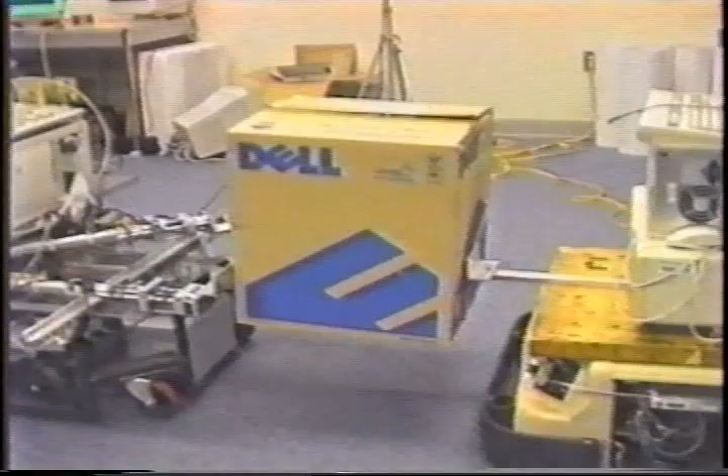We have developed a small team of heterogeneous robots which cooperatively grasp objects and transport them in a partially structured or unstructured environment. In this program, you will see a TRC LabMate equipped with a passive arm, a TRC LabMate equipped with an active force-controlled arm, and a Nomad XR4000 equipped with a stiff position-controlled forklift.

Two robots are used to move objects of different geometry and mass. The platforms can perform turns to avoid obstacles.

When picking up an object, communication between the robots is critical. The compliant force-controlled arm pushes the object onto the lift. Upon completion, the XR4000 picks up the object while the compliant arm constrains it. The two robots secure the grasp by applying a preload before beginning the motion.

With 3 platforms, our system is also capable of carrying flexible objects such as a board. In this example, the center platform helps to support the board and the object. A critical aspect of the system is the compliant force-controlled arm.

The rear platform is equipped with a novel forklift-like arm which possesses intrinsic mechanical compliance. This is achieved by incorporating linear springs in a parallel 3-degree of freedom manipulator. The spring extensions are adjusted in real time using a position control system to achieve the desired link stiffness. Therefore, a Cartesian endpoint compliance of the entire arm can be easily changed.

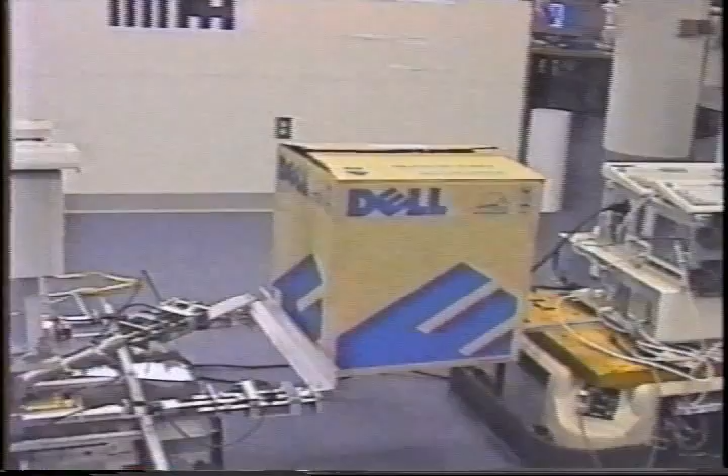Because the arm is compliant, a mobile robot can manipulate or interact with stiff objects not precisely positioned in the environment. Another important feature of this system is the ability to transport objects without special purpose fixtures. We use palm-like end effectors to grasp the object and maintain force closure by coordinated control.

The coordinated control of the team is achieved by designating 1 or more leaders. Each leader plans its own path based on sensory information, and the followers are responsible for maintaining force closure and avoiding collisions. The communication is possible through a wireless peer-to-peer network, sending packets at a precise interval.

In the 2-robot formation, the trailing platform follows the lead platform like the rear wheel of a bicycle. The front wheel or lead platform steers while the rear wheel or follower platform trails behind at a fixed distance. Similarly, in the 3-platform example, a tricycle analogy can be used.

In conclusion, we have developed a system of multiple coordinated mobile robots. Multiple heterogeneous robots are able to coordinate and transport objects around obstacles even with platform errors and disturbances. The key features that make the system successful are an architecture and communication scheme that allows the robots to cooperate, simple planning algorithms based on the bicycle or tricycle model, and an actively controlled compliant arm that accommodates errors.

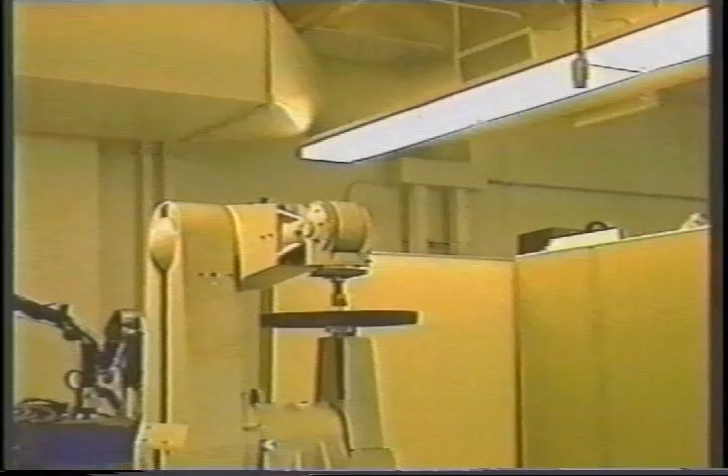The goal of the project is to extend the payload of a Puma 762 beyond its 45-pound limit set by the manufacturer. To demonstrate our results, we tried to find the largest weight that the Puma could lift from the downward posture shown to the upward posture.

First, we swing a 45-pound weight by moving joints 4 and 5 of the Puma. This is the maximum rated payload of the arm.

Next, we attempt to move 90 pounds on the same path. The attempt fails, demonstrating the 45-pound limit.

We then solve the optimal control problem to find the path that maximizes the payload. It was solved by gradient method starting from an initial feasible path. Note how in this case, energy is pumped into the system during the swinging motion. This solution lifted a maximum of 70 pounds.

When more degrees of freedom are added to assist in the motion, the individual joint torques are reduced. In this case, we allowed all 3 wrist joints to move. We'll see the motion again to observe the wrist going through a singularity. While moving through the singularity, some joint torques are reacted by the structure and not the actuators.

Finally, we allowed the algorithm to vary all 6 joints. We found several local minima to the nonlinear optimal control problem. For our first solution, the Puma lifts 115 pounds. Again, we see the path move through a singularity.

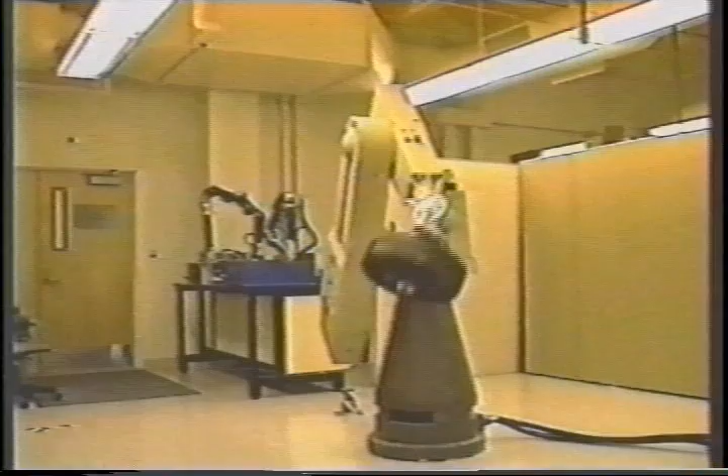For our best solution, the Puma was able to lift 145 pounds. This increased the payload capacity of the Puma by more than a factor of 3. Again, we'll see the Puma more than triple its payload capacity.

Industrial automation. HiLab, a high-level system for generating, representing, and evaluating assembly sequences. Germany.

The goal in robot assembly is to build a mechanical product which can be assembled by robots. A high-level assembly planning system generates sequence plans specifying the order in which parts are to be assembled and computes the trajectories to bring the parts together.

The high-level assembly planning system HiLab, introduced in this video, uses geometric and physical reasoning to find an optimal plan. HiLab also provides a new approach to assembly stability and a user-friendly human-machine interface.

The assembly components are represented as CSG objects. A set of symbolic spatial relations define the topology of the assembly. Here the user defines a shaft-fits-hole and a face-against-face relation. After the definition of all symbolic spatial relationships, the user checks the topology with HiLab's animated exploded view.

Here a motorcycle engine consisting of 27 components is shown. The user defined the topology using symbolic spatial relationships as illustrated before. The system automatically generates and evaluates all valid assembly sequences based on the assembly by disassembly philosophy, considering local and global assembly constraints like connectivity, geometric feasibility, and assembly stability.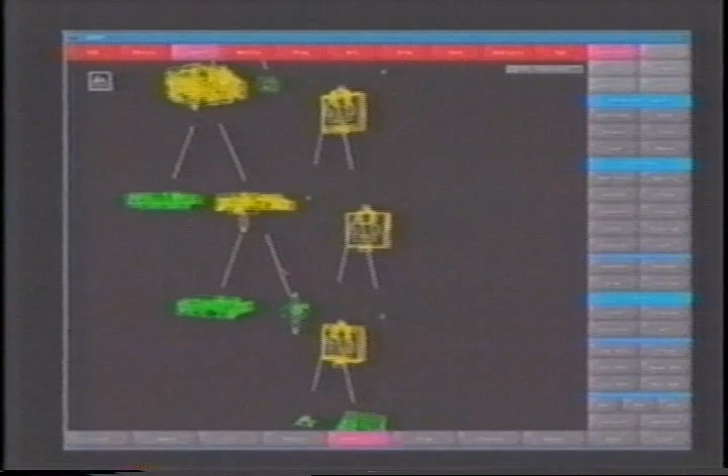The optimal assembly sequences are stored as hyperarcs of an AND/OR graph.

HiLab provides a new approach to assembly stability. The set of stable orientations, marked red, is calculated with linear programming methods and is projected onto the unit sphere. With increasing stability on the unit sphere, the costs assigned to the assembly operation are decreased.

The output of HiLab is an optimal assembly sequence plan, which is used to program robots automatically. We used the robot simulation system IGRIP from Deneb Robotics to simulate the sequences. Stäubli Unimation robots are used to execute the assembly plans in the real world.

HiLab automatically generated and evaluated the sequences, trajectories, grasps, reorientations, and other criteria out of the user-defined topology of the assembly.

Industrial automation. 3D CAD data-driven assembly robot cell system. Japan.

From Ricoh and Hashimoto Laboratories' endeavors has come a prototype CAD data-driven system called the Autonomous Assembly Robot Cell System, ARC.

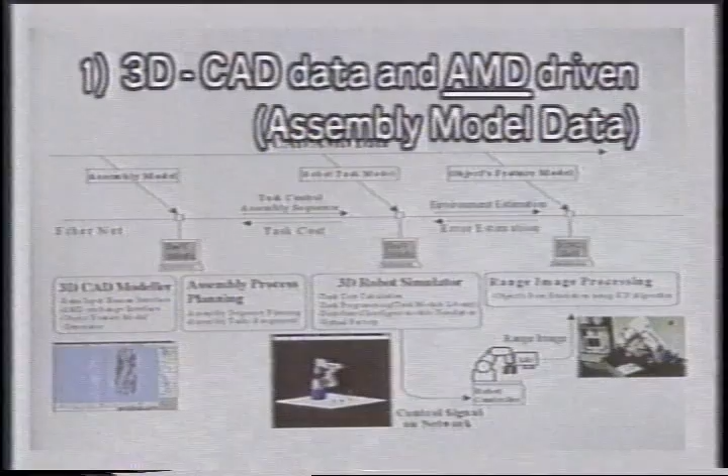The primary features of the system are control by 3D CAD data and assembly model data, external environment recognition by the hand-eye system, assembly task planning using assembly model data, and automatic generation of robot task programming.

Here, multiple robots are given assembly task assignments using an assembly model. A developer unit for a Ricoh copying machine consisting of 25 parts was used for this simulation.

The number of robots required and the takt times were calculated based on the desired production quantity for the day and the robot's operation time.

Now for planning of each robot's sub-assembly sequence. As seen here, a sub-assembly consists of 9 parts. A possible assembly sequence model is automatically generated from the liaison collision graph analysis using PetriNet.

From this model, the optimal assembly sequence is ascertained on the basis of assembly cost, as calculated by the robot simulator. In this case, assembly time was used for evaluating cost.

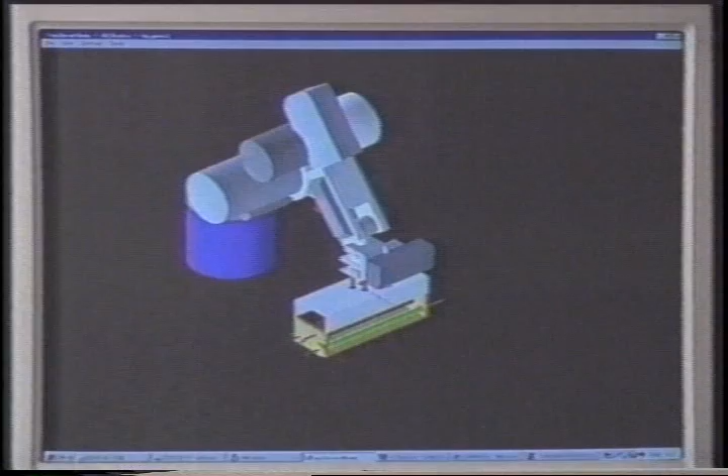Robot task program modules, some of which are stored in the robot simulator library, are configured according to the assembly sequence planning. The values of the variables for the program modules are obtained from the 3D CAD and assembly model data, from which the task programs for the assembly process are derived in the virtual environment.

The robot examines the dispersion of the assembly part's position and orientation via the hand-eye system, which measures the range image with a laser rangefinder.

In order to recognize the component parts and their positions and orientations in the workspace, product feature models are needed. This is provided by the surface sampling data of the model, which is contained in the 3D CAD data.

Position and orientation can be ascertained using the ICP, or Iterative Closest Point algorithm. As demonstrated here, the ARC system is capable of autonomously performing assembly task assignments and sequence planning from product model and assembly model data.

Industrial automation. Folding cartons with fixtures. USA.

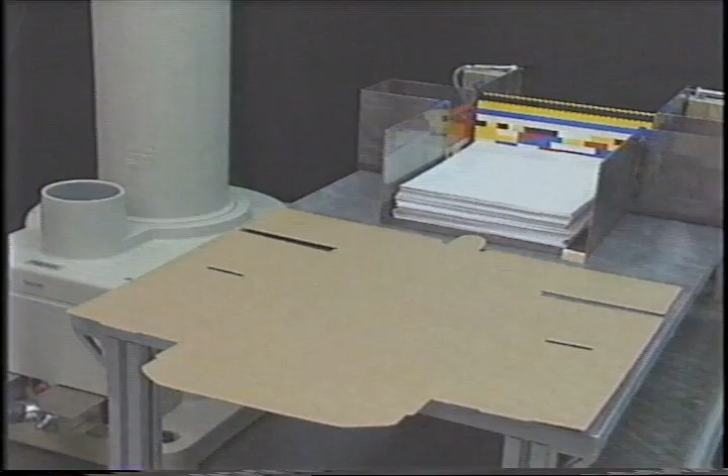We present a flexible method to fold cardboard blanks into cartons by moving them through a fixture. These cartons have self-locking tabs and are used for product packaging.

Our implementation uses an Adept-1 robot to move the carton through the fixture. Fixtures for different cartons can be interchanged for rapid product changeovers.

A fixture is designed for a given carton and a selected carton folding sequence. The fixture walls fold the carton panels as the carton is translated in contact with the fixture.

We now demonstrate the folding of a carton with a fixture. The robot uses vacuum suction cups to hold the carton and executes a sequence of folding operations.

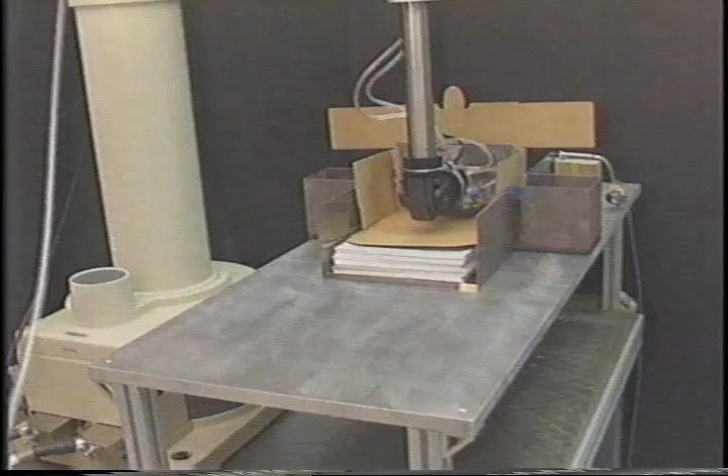Here, folding is performed in 2 stages, with the rotation of the carton between them. The fixture is equipped with 2 pneumatic actuators to aid the folding.

The folding sequences are generated by a motion planner that models a carton as a manipulator arm with rotary joints and branching links. Each folding sequence corresponds to a path from the carton's initial configuration to its goal configuration. The folded carton is ready for insertion of the product.

Robots in games and competition. Beach ball volley playing robot. Japan.

Future robots are going to work in your houses and hospitals with humans. Toshiba has developed a beach ball volley playing robot as a demonstration of such human-friendly robot technology.

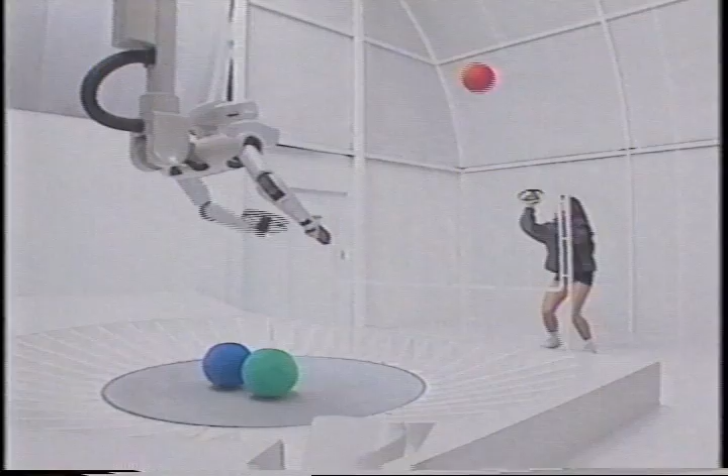We consider that it is essential to interact with the robot using everyday words such as, "Let's play volleyball." For the everyday word commands to work, the robot needs to measure the target's relative position with respect to the robot position, to know the mechanics and procedures of the tasks, and to have a good database for the environment and the target.

With an integrated sensor feedback technology, we have demonstrated a robot which can play beach ball volley with an opponent, pick up a ball from the floor, and shake hands with a human by only one respective everyday word command.

The robot uses 2 head-mounted CCD cameras to measure the target ball position every 1/60th of a second. The cameras always track the ball.

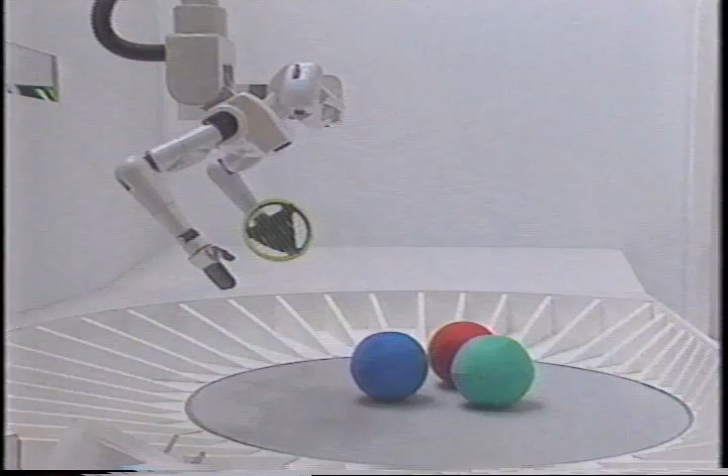The operator commands the robot to pick up the red ball. The robot starts to search for the red ball on the floor. After finding the ball, it moves above it.

Then it checks the arrangement of all the balls to make a plan to pick up the ball. When the robot finds that the arrangement is too difficult, it pushes the green ball aside and checks the ball arrangement again. Then it picks up the red ball.

We use visual servo control at the rate of 1/60th of a second to achieve this picking up motion. This is the robot view. After pushing aside the green ball, the robot checks the arrangement again and approaches the red ball using visual servo control.

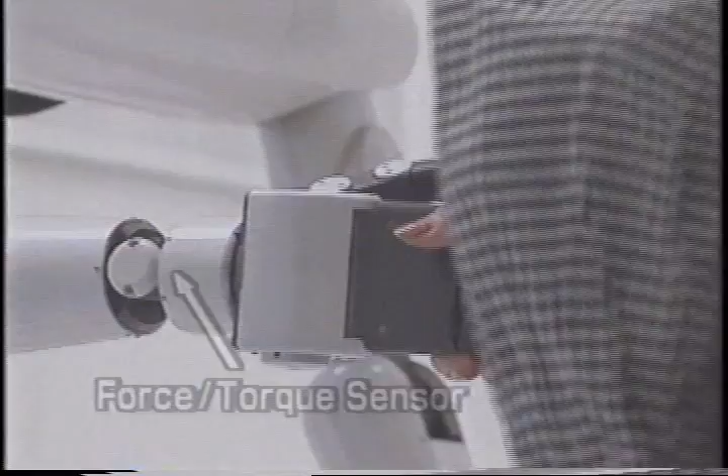Also, to show the human friendliness of the robot, it can shake hands with a human. It has a tactile sensor in its right hand to start handshaking. It also has a 6-degree of freedom force torque sensor at its wrist to readily respond to the young lady.

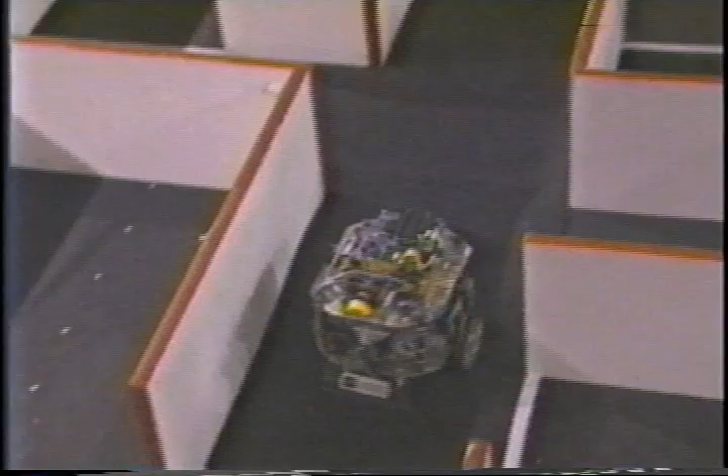The 1998 winner is Phoenix, shown here, built in the Robot Engineering Lab at Trinity College. Infrared ranging sensors on Phoenix enable non-dead reckoning operation via wall following and edge detection.

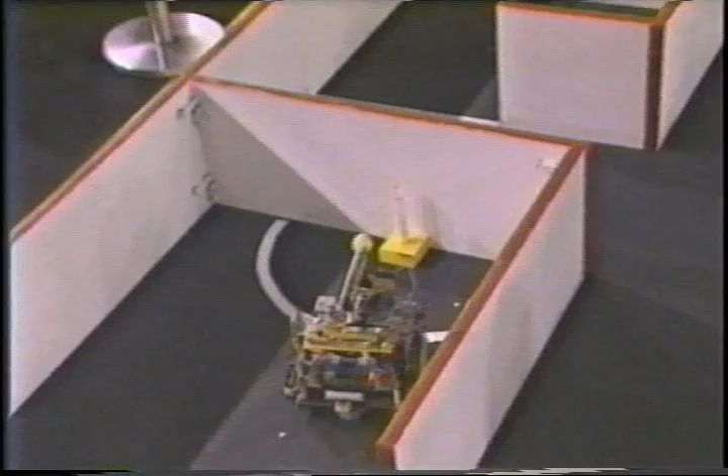The contest encourages innovation by inventors of all ages and affiliations, and it provides an ideal medium for teaching engineering design.

Robots in games and competition. Robot soccer system for NaroSot. Korea.

This video shows 2 soccer robot teams, Best and Y2K2, and a demo game between them. The FIRA Robot World Cup France 98 in Paris witnessed the smallest robots ever to play the game of soccer, between the Y2K2 and the Best teams from Korea. It was the NaroSot category, with robots sized 4x4 by 5.5 centimeters.

In the NaroSot category, only vision information is used as feedback, and there are no internal sensors such as encoders within the robots. Due to this, precise and fast robot control is difficult. Instead, cooperation and coordination among robots is very important in NaroSot, as there are 10 robots on the playground.

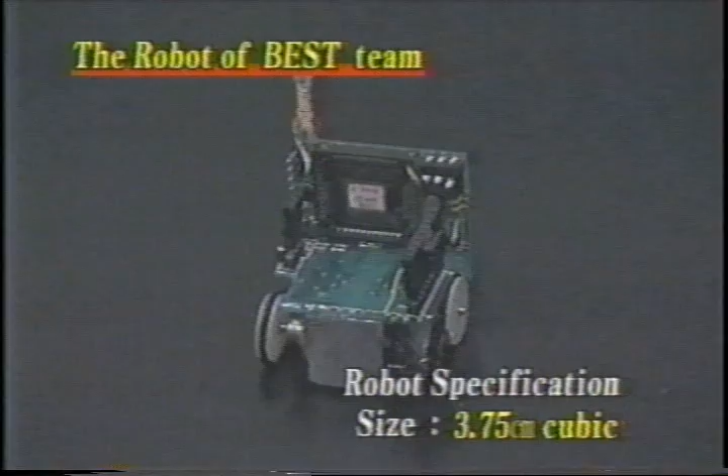The robots of Best Team are 3.75 centimeters cubic and have an 87C51 microcontroller, 2 DC motors without encoders, and an RF communication module. The Best Team is designed with 2 DC motors fixed in parallel due to the small size.

A 3-level hierarchical scheme for visual servoing, target generation, and role allocation constitutes its control structure. Dynamic role allocation is done in the highest layer, the role allocation layer, as per the context and role importance. This shows our simulator for tactics.

A 2-to-1 formation is normally adopted. One of the defenders is assigned to attack as libero when the 2 attackers are blocked.

The Y2K2 team uses 2 centrally aligned wheels, which are easier to control. 9.6-volt rechargeable cells are used for power supply. Although the same color patches are used, the robots are distinguished by robot position tracking.

2 actions are defined for the robots: to follow the vector field and to shoot. Under normal conditions, robots follow the vector field. The action selection layer selects the shoot action when it is in a good position to do so. A 2-to-1 formation tactic is used as a zone defense scheme.

Let us watch a demo game between the yellow color Best and the blue color Y2K2 teams. The Best team is kicking the ball. The ball is passed to the Y2K2 goal area. The robot at the center shoots the ball. The other robot shoots the ball again and scores a goal.

The Best team robot shoots the ball again, but the Y2K2 goalie blocks it. The ball runs into the other side of the field. The Y2K2 starts attacking. The Y2K2 robot passes the ball to the center of the goal area and scores a goal.